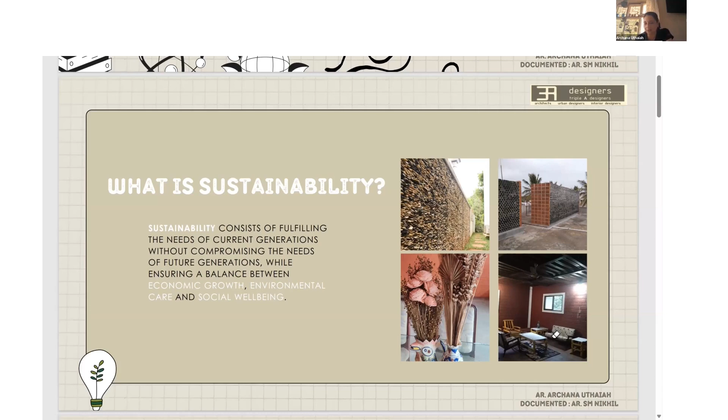If you can see some of the experiments I have tried - all the pictures here are of my personal house. It's like a lab. My house is like a lab, so whatever I try here, I then try in my projects for my clients.

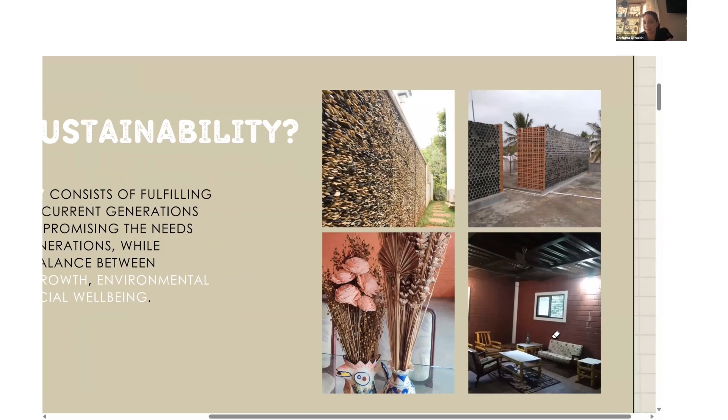If you can see the pictures, these are all recycled bottles that have been used. This is a cabin house in our estate in Coorg, where I've tried to use bamboo. These sofas are made out of bamboo, and these are all interlocking blocks - soil stabilized blocks. The roof is made of something called a decking sheet - we'll come to that when we talk about the project, and I'll tell you what exactly these materials are.

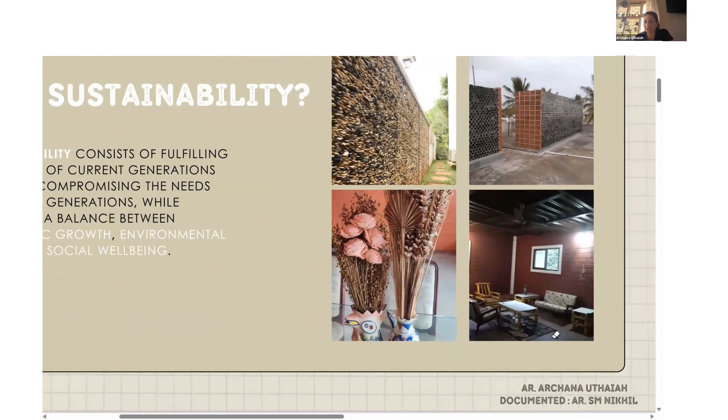It is also about how we save resources. These are dry flowers - when we say we have to go green, the first thought is that going green means fresh flowers and things like that. Again, we have to give thought to how much we actually waste in terms of resources and water when trying to grow fresh flowers on a large scale. So what are the alternatives? Basically, you have to be creative in your way of building - that is what sustainability is all about.

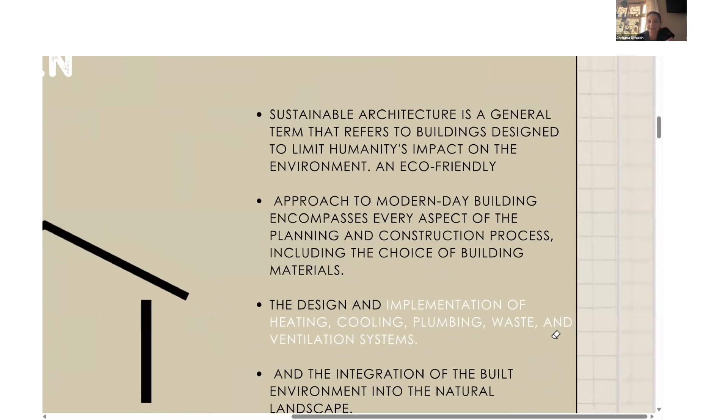Sustainable architecture, in general terms, refers to building design - how we go about building buildings so that they have the least impact on the human environment. The approach to modern day building encompasses every aspect of planning and construction.

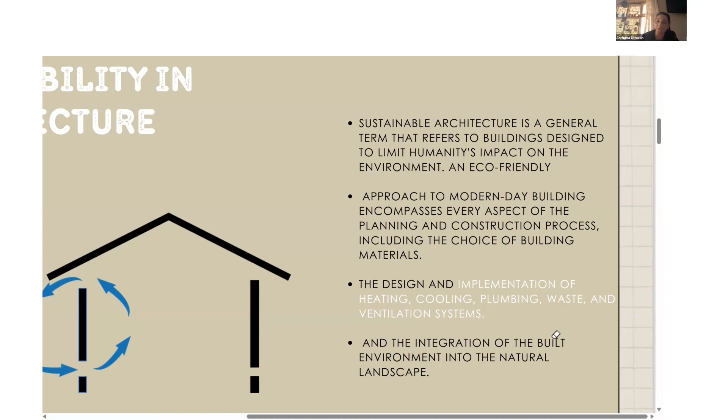It is how we try to reduce heating, how we heat the building naturally if the area is very cold, what are the ways of plumbing, how we manage waste disposal, and what kind of ventilation systems we use. We try to use artificial ventilation as little as possible, and maximize the benefits of daylighting - basically, how you circulate air within the building. We all know cold air settles down and hot air rises up.

These are some design elements from my projects, where I give openings at a lower level so that cold air comes in, and hot air rises up and goes out of the building. These are the concepts, but then you encounter so many problems along with it.

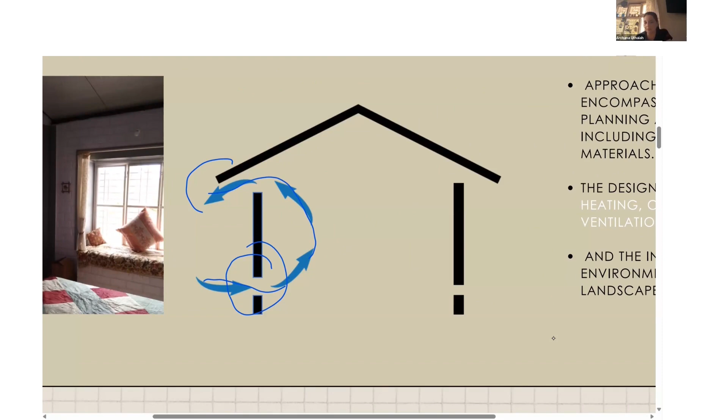If you give openings like this, your client is not going to agree. Most of my projects are in Coorg, which is a high rainfall area and very humid. It's also very close to nature, meaning you have all kinds of wild animals, rodents, and so on. So if I give openings like this, you will always have rodents and birds coming in. So you have to think about how to seal these spaces, yet still allow the air to flow.

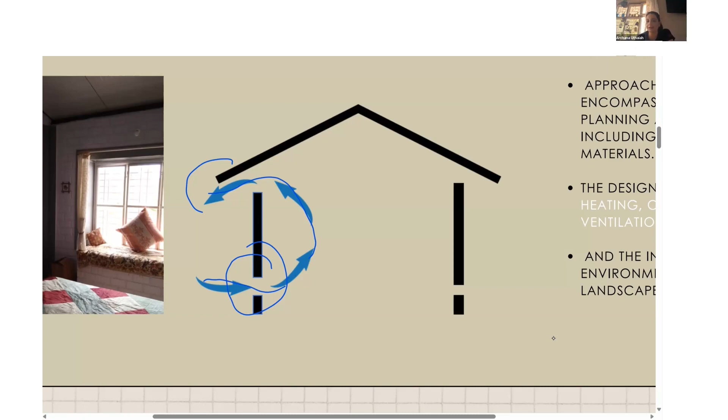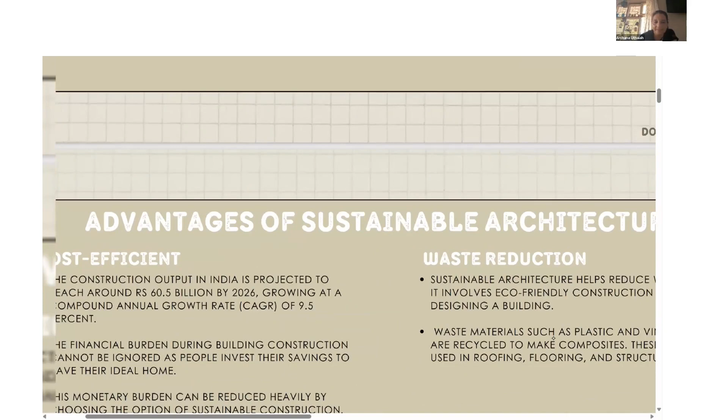Okay, so let's look at the advantages of sustainable architecture. Yes, we all know it is cost effective, but it is cost effective only if you use material that is available as close to your site as possible. You say, yes, I'm going to use Betham stone, get it all the way from Rajasthan, or this Betham stone is basically from Hyderabad, or use sandstone from Rajasthan to a place somewhere in the south. So that is not cost efficient.

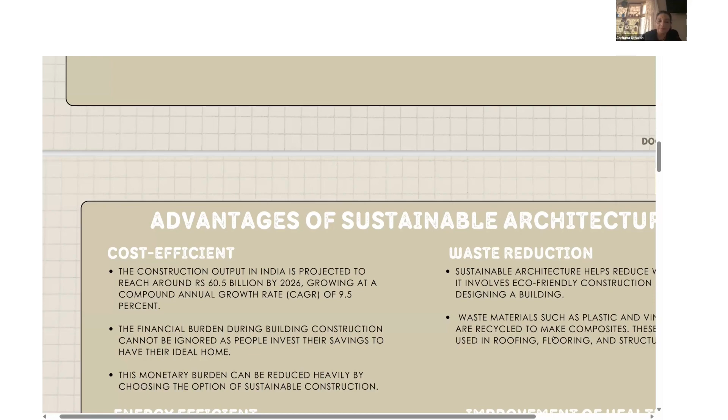Yes, you're using a material which is sustainable, but you have to think about the cost, how much you've spent on transporting this material, what fuel is used, and what labor you have incorporated. So cost efficiency is a very broad term. It's not easy to say how much it costs. It is cost efficient, but the same product that is cost efficient in one place might become very expensive if I use it in some other location. So yes, sustainable buildings are cost efficient because we use natural material.

One more advantage of using natural building material is that since it's nearer to your construction site, you can always order as and when you want. Whereas if you go in for, for example, vitrified tiles, they'll say minimum you have to order so much, so wastage is a lot. With this, as you're constructing, you can always order what you want, so you can control your wastage.

And yes, we all heard about how energy efficient it is. It cools you during the daytime and warms you up during the night. All these natural materials breathe by themselves, like stone, brick, and wood. They all breathe by themselves, so it is very energy efficient. You do not need extra heating or cooling devices.

And yes, you have health benefits. It improves your health. You're closest to nature. It is the same kind of environment you were born into that these natural materials provide you with. But at the same time, it's not all gold and roses. Using natural material, as architects, you come up with lots of challenges also.

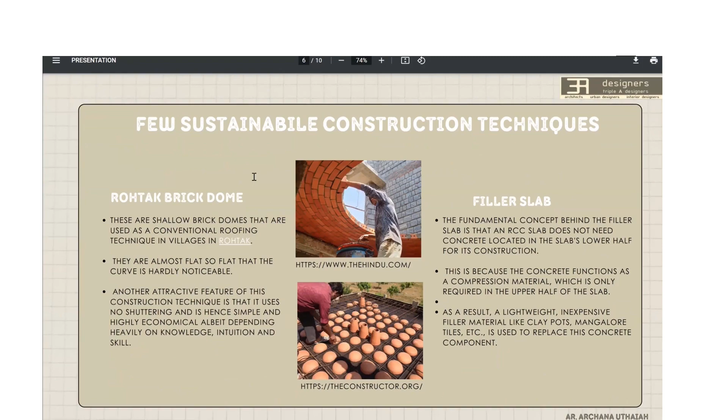These are some examples as to how we can use different elements of a building, sustainable alternatives to roofs. The first one is called the Rohtak brick dome. I'm sure some of you are aware of it, because recently on the internet it became quite viral. The roof is actually made using the arch technique, and the mason just lays the brick. You have to make a proper beam all around.

They start laying the bricks in a circular fashion, like an arch. The difference in height is almost a flat roof, so you can build another floor over it. The difference from the center to the periphery is only around 9 inches, so for a building of around 18 to 20 feet, you can achieve almost a flat roof.

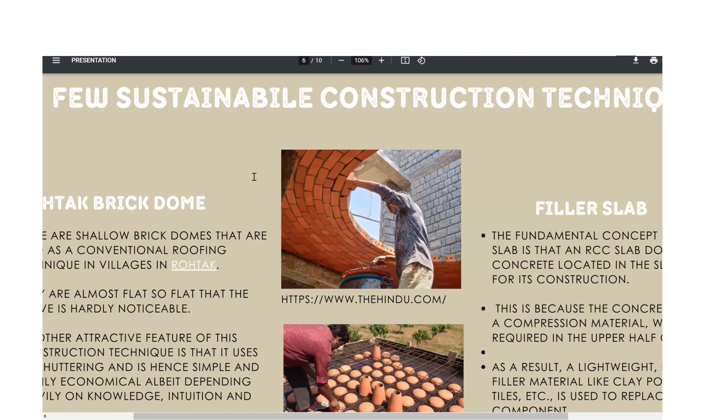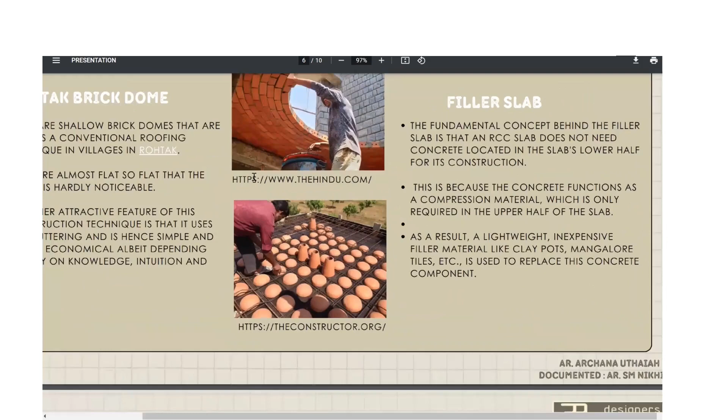Another roof we use is called the filler slab. These are the alternative for regular RCC roofing. By using these filler slabs, the amount of concrete used is very less, and also the steel—you can reduce 1/3 of the requirement of steel by using this kind of roof.

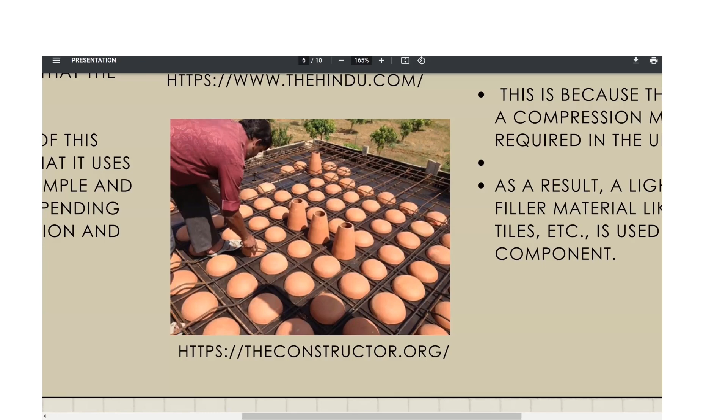These filler slabs, in this case, the picture shows using clay pots. There are some half clay pots they have used, but as we look into some of the projects, I have used clay bricks called Hourdi tiles, which is also locally available in Karnataka.

Another material we use in our building are soil stabilized blocks, which we actually construct right at the site itself. They are made from the mud we obtain by digging the foundation. These bricks are mixed with 7% cement and set on site.

Nowadays there's a variation—you can use interlocking bricks also, so the amount of mortar used is very less. Like Lego blocks, each brick gets into the other, fitting perfectly. The advantage is your expense goes drastically down because the material is obtained right from the site, and since you have interlocking blocks, the construction is much faster.

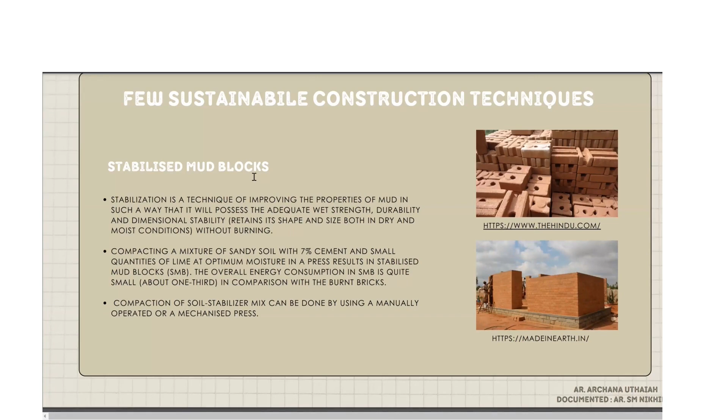It's faster, and you get quite a smooth surface on the wall, so you can forego plastering. It's also thermal—it cools you during summer and warms you up during winter.

Initially they were just covered by stone pergolas, but then slowly, as it started raining heavily, the rain used to splash out, so we had to cover it up with a glass skylight.

The challenge was, if you cover it with a glass skylight, the whole purpose of ventilation is lost. So we had to give gaps on the side so that air goes out, and these side gaps were covered with perforated metal sheets.

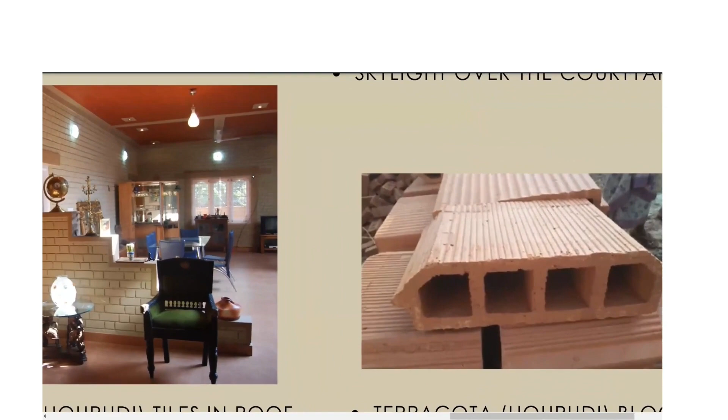The roof used here is filler slab, and this is how the filler slab looks. This is again another alternative to providing an RCC concrete flat roof.

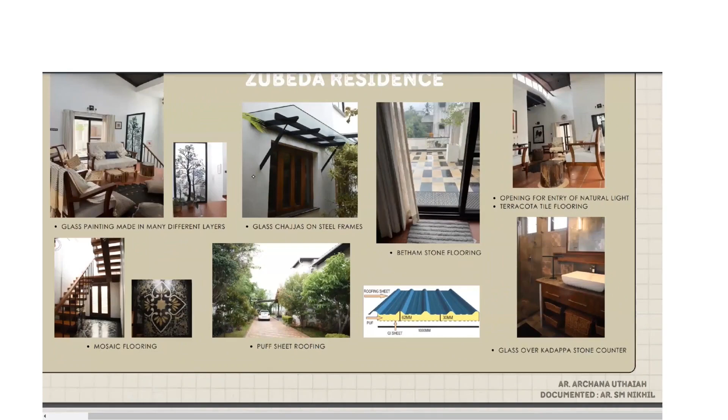Again, stone was used in the washrooms, for the walls and the flooring, Betham stones. And then we used gray granite or gray kadappa, ordinary kadappa, for the countertops. As you know, counters need to be smooth for easy maintenance.

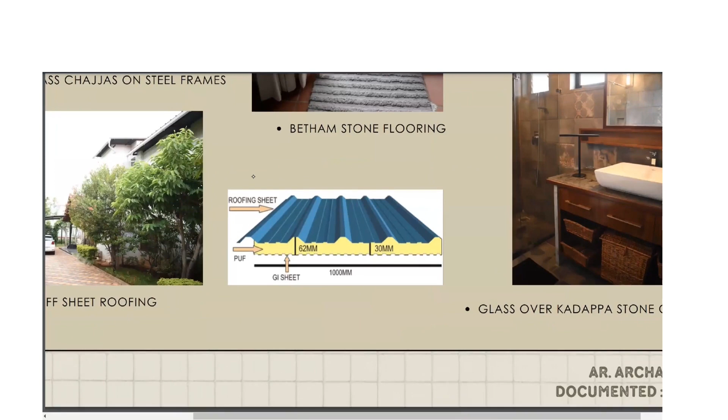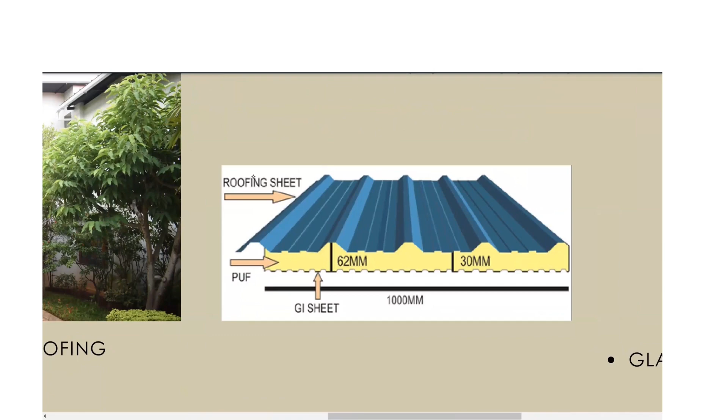So we put a glass top on the kadappa counter. The roof here we used is something called a PUF sheet, a metal sheet with fiber, a polyurethane foam sheet. It gives you a kind of insulation. It is a sloping roof. It gives insulation, and since it's packed with this fiber, when it rains it doesn't make any sound.

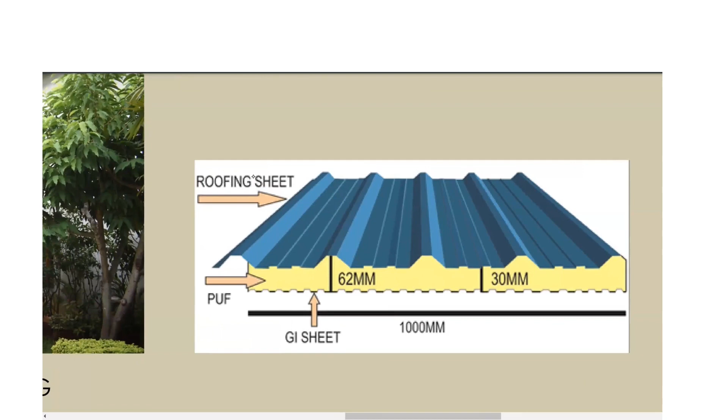For aesthetics, we had to paint it. We painted it inside, and at places we painted it a different color to match our interiors. Also, at places, since she wanted it, we had to put a false ceiling on the roof. Interior we put false ceiling, and exterior we painted it the same color, just to make it a little more appealing.

The wood here, for the staircase, is all recycled wood. Actually, they own a wood factory, so all the cut pieces we got, we used for the staircase. These are all cut pieces or leftover wood from the factory that we used for the staircase.

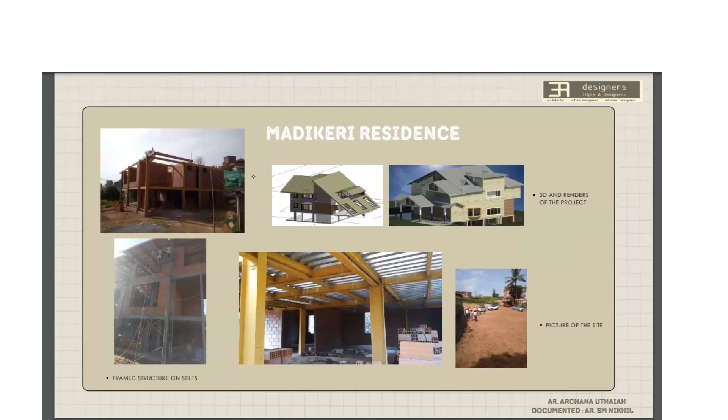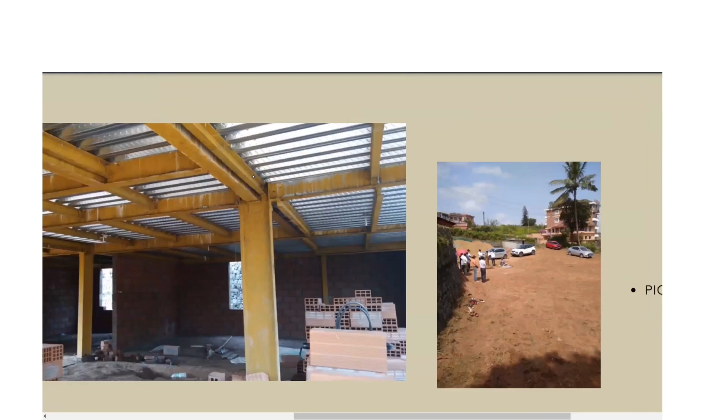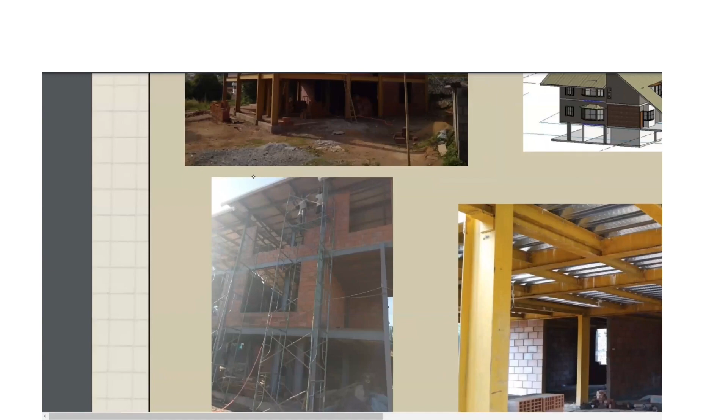This is an ongoing project, again in Coorg, Madikeri. As I told you, the climate there has heavy rainfall and lots of humidity. Since the site was sloping, we had to use stilts, so the whole building is on columns. It is a frame structure where the walls are not load bearing, so we used normal hourdi blocks for the walls.

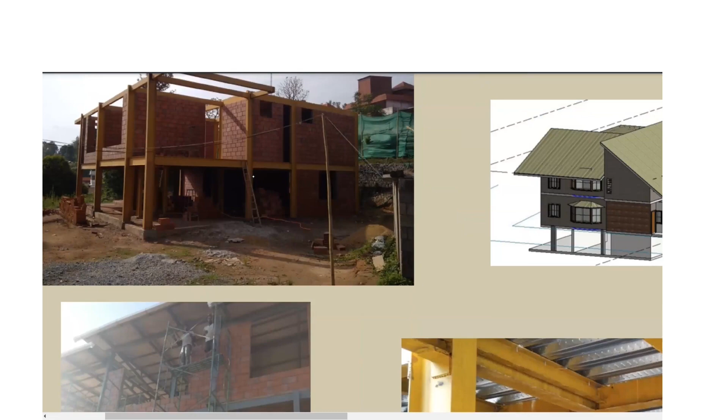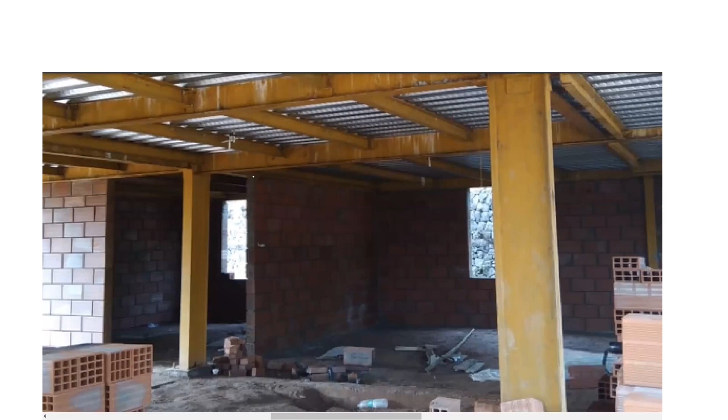It's still a decking sheet here. Decking sheet is a 1mm metal sheet, a kind of corrugated sheet. On top of it we have steel reinforcement. Since the sheet itself is made of steel, the main reinforcement is reduced drastically. You just put a distribution bar, and over it use around 2 inches of concrete. So this sheet, including the corrugation, comes to around 4 inches thick.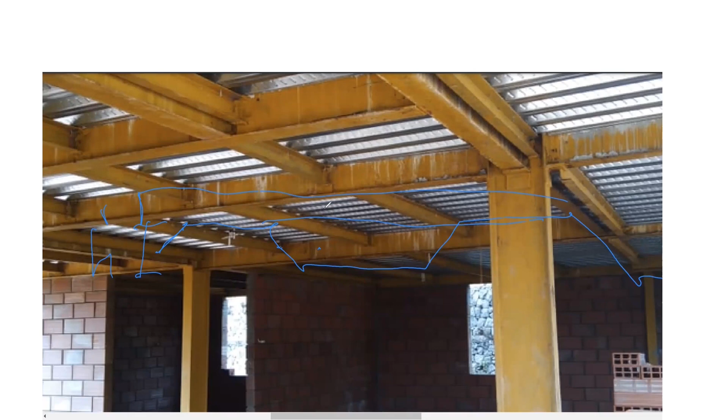Wish I could annotate this. The sheets are shaped like this - this side is 1 inch thick, and this side is around 4 inches, with 2 inches of concrete over it. So your concrete is reduced, your main reinforcement is reduced. One more advantage of using decking sheet is you do not need any form work or shuttering, so it can be constructed very fast.

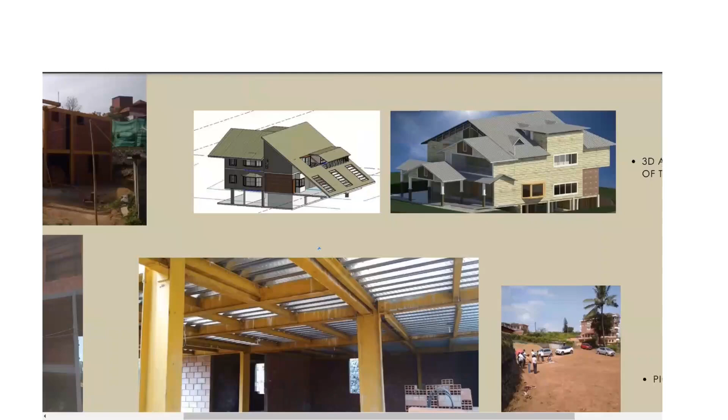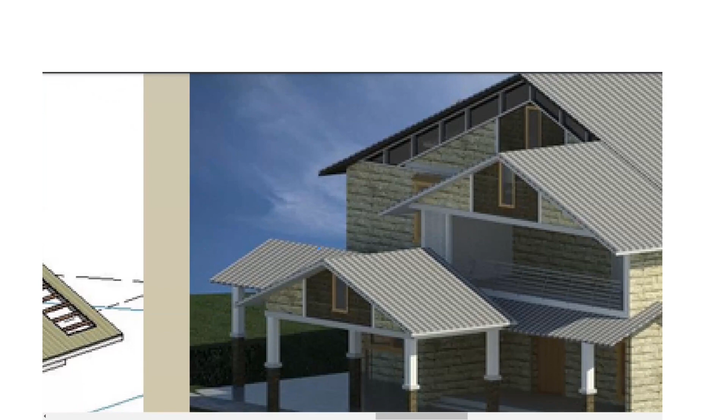Again, here the space between the wall and the windows where we provide skylight, but the gap has to be left. So we were thinking of using perforated glass panels, so that you have the air moving in and out. At the same time, it stops rodents and birds from coming into the building.

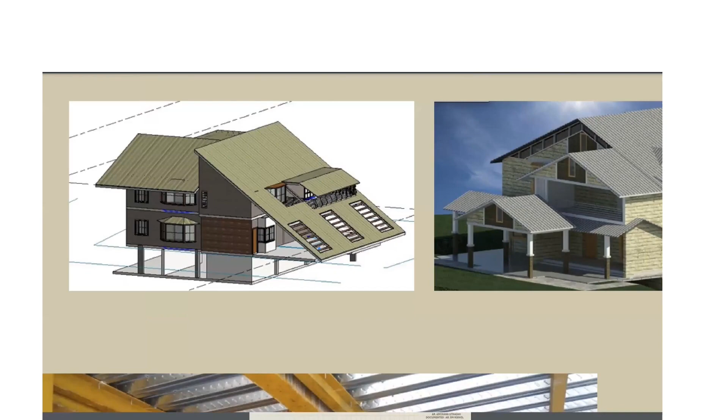Yeah, that's the end of my presentation.